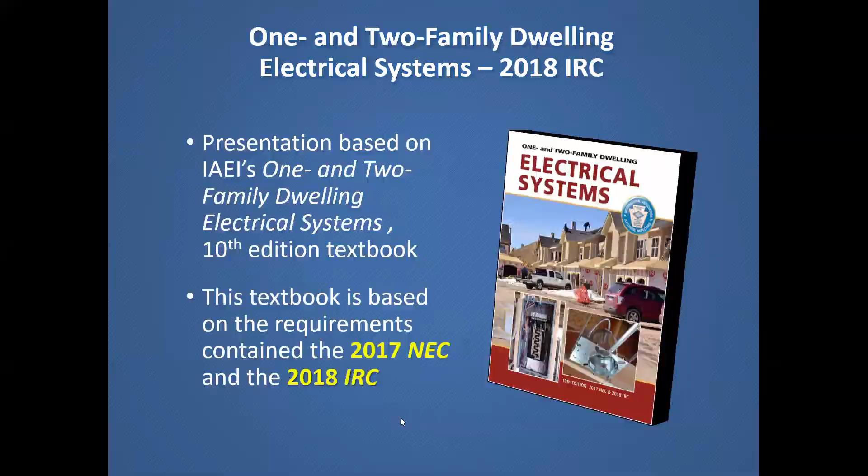When I build the PowerPoint for this presentation, I actually build 2 PowerPoints, one based on the NEC and one based on the IRC. And of course, the one we'll use today is based on the IRC. Now, when you start dealing with the electrical requirements of the IRC, you have to set some parameters or ground rules here. Like I said, Part 8 is where the electrical requirements are found in the IRC, beginning with Chapter 34 through Chapter 43. And I wanted to highlight this first sentence right there. I'll blow it up where we can read it.

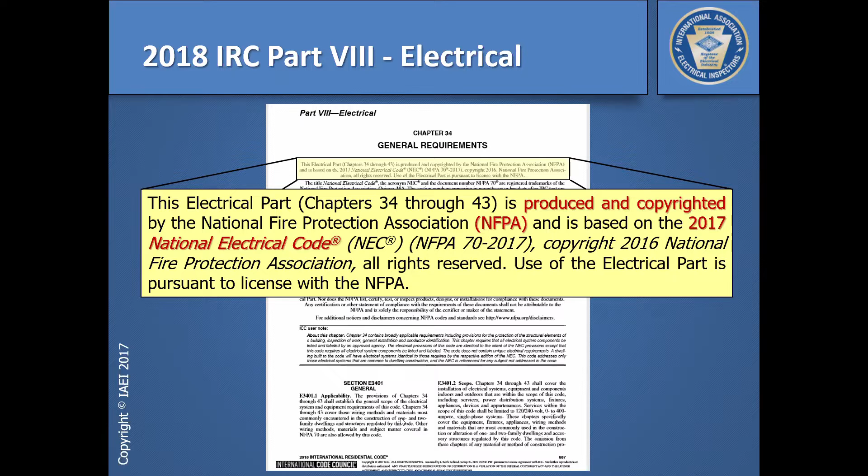These electrical parts are produced and copyrighted by the National Fire Protection Association. The reason I bring that up is that's the exact same people that write, own and copyright the National Electrical Code. So a lot of times people will look at the IRC Part 8 as one electrical code and the NEC as another electrical code, which it is, but it's all basically the same material, and it's written and produced by the same people. And right down here, it even says that the electrical provisions of this code are identical to the intent of the NEC provisions.

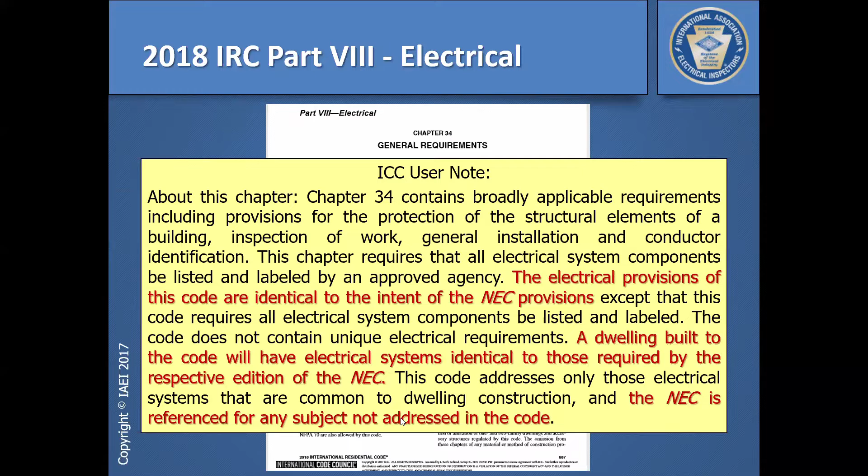And it also talks about if we come across something here in the IRC that is not covered in Part 8, it tells us at E3401.2 in the scope of the IRC that when we come across something that is not particularly covered by the IRC, we can't just ignore it. We have to default to the NEC.

So, let's say the IRC will address an electrical service up to 400 amperes. Well, if you got into a large dwelling unit with a size larger than 400 amperes, then we would default to the NEC. And you'll see several places as we go along today where we would have to default to the NEC, and of course I'll point those out to you as well.

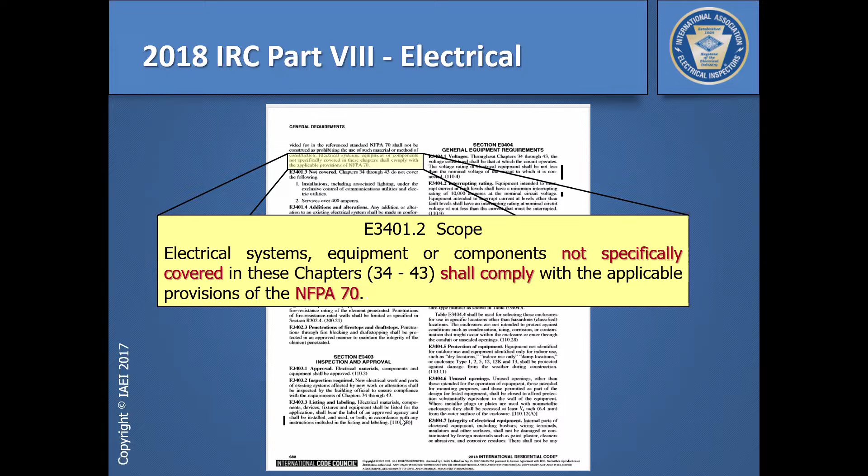I suspect greatly that I have several combination inspectors on the line with us today. And if that's true, of course, you have to be prepared and enforce several codes, not just one code: the mechanical code, the electrical code, building code, and so on. And especially when I'm doing a class with combination inspectors, I often hear that of all the disciplines you have to enforce, you typically have the most difficulty with the electrical code,

and that there's gray areas in the code, and that's really not a mistake. It's not. It's by design, actually. And so yes, there are gray areas in the code, and we need to address them. An example of that I could give you here is E3601.6.2. Now that's 230.70(A)(1) in the National Electrical Code.

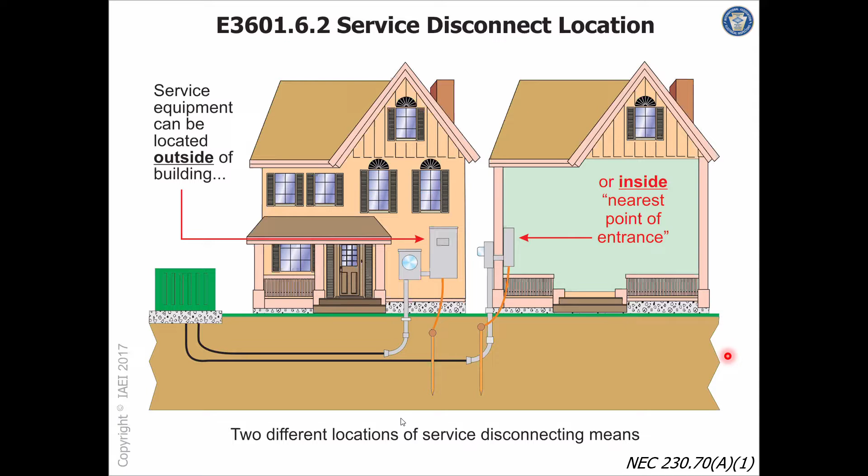So yes, there are gray areas in the code, and I can make you a better inspector leaving this presentation today than when you came into this presentation if you'll just simply do one thing for me: embrace gray areas. Don't hide from them. One of the worst experiences I've ever had in my career was being a student in a class, and the instructor would not embrace gray areas.

When we would get to one of those quote unquote gray areas, the instructor would just jump past it right quick and say, "Oh my gosh, hope nobody asked me a question about that." Well, that's not what we're going to do here. We're going to look at these gray areas and embrace them and discuss them so that we can get some semblance of consensus interpretation for some of these rules.

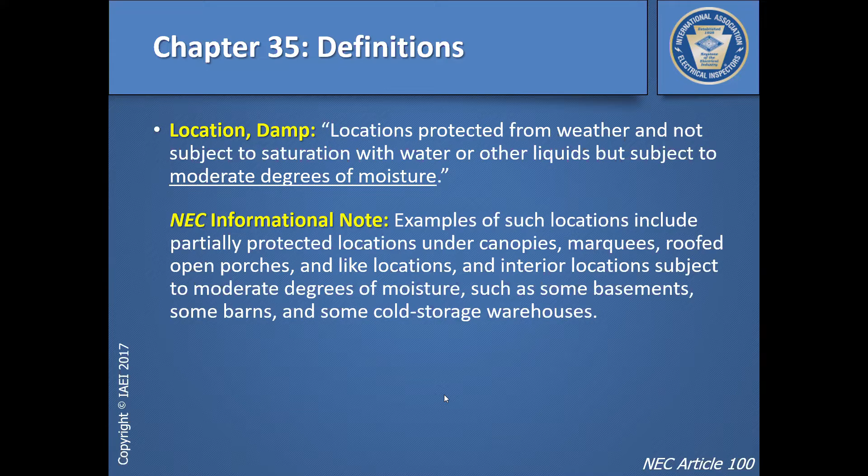Now, here's your first question of your test here today. Who's going to determine which location we're in? There you go, everybody. It's the AHJ. Now, hopefully the AHJ will use these definitions out of Chapter 35 or out of Article 100 in the National Electrical Code to make a determination as to where you're at.

The first one we see here is a damp location, and that tells us that in those locations, we're going to be subject to moderate degrees of moisture. In the National Electrical Code, it even gives us an informational note and gives us some examples of where a damp location might be. Locations under a canopy, marquees, roofed open porches, places like that.

When we used to travel, and hopefully we'll get back to that at some point, I used to stay in a lot of hotels, traveling and doing these training presentations. And a lot of times I would pull up to a hotel and they'll have a canopy or a drive-through, where you can pull your car up. If it happens to be raining or something like that, you could pull up under that overhang and unload your luggage and things like that.

And it's just my nature. I can't help it because it's my business. Anytime I get in an area like that, or a restaurant or wherever I'm at, I'm always looking around for code compliance, code violations, things like that. And I can't help when I pull up under one of those overhangs there at a hotel, I'll look up and say, that's a damp location right there. That's a wet location right there. Those type of things. And there's some places up under that overhang that I would consider a damp location if I were the authority having jurisdiction.

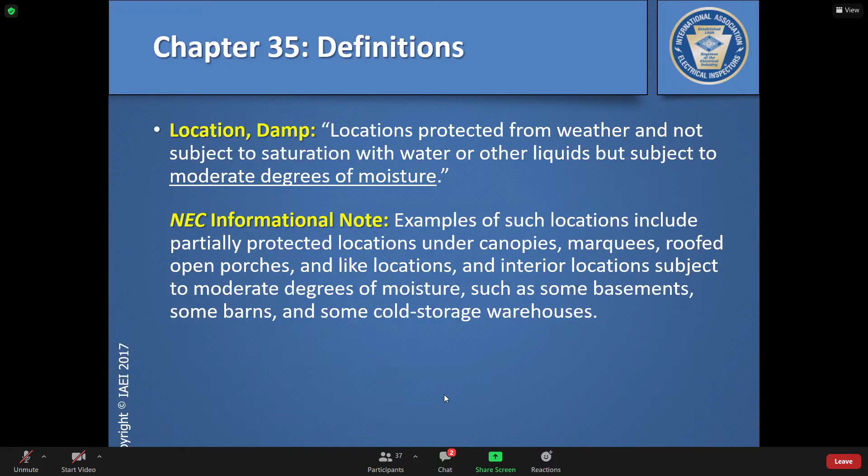And then we look at the next location, a dry location, and that would be a location not normally subject to any dampness or wetness. And man, whoever came up with this definition, I think they hit this one right on the head. I like that term, not normally subject. How many times have you seen on the news when a hurricane comes through an area, and you'll see buildings that are normally not subject to any dampness or wetness, but yet during that hurricane, there's water 5 feet up on the wall. So yeah, I think they kind of nailed that definition right there. Locations not normally subject to any dampness or wetness.

I'm looking on the screen here at some of y'all's photographs and images, and looks like a lot of you are at your house. Some of you are at your office. I happen to be at my office today, and my office here in particular, if I were the authority having jurisdiction, I would determine that this is a dry location. It's a location that's not normally going to be subject to any dampness or wetness.

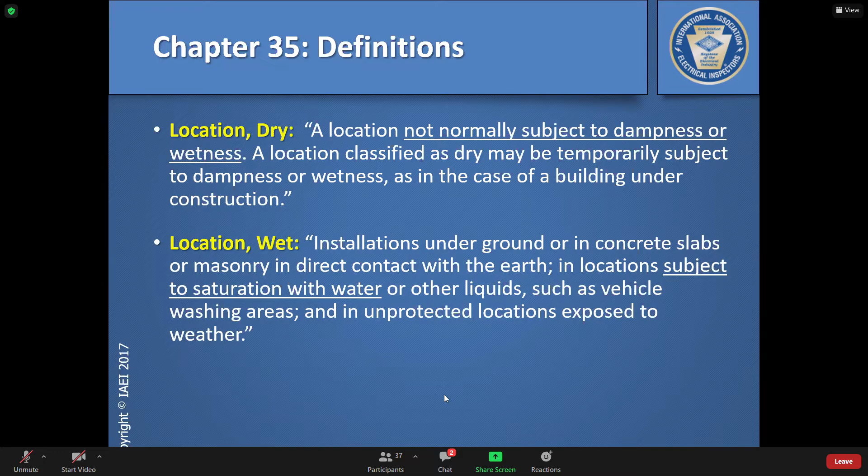So we've got three choices here, either a damp, wet, or dry location. All of them are defined in the code for us. And now we need to go put these into practice. So we find ourselves standing in the backyard of this particular dwelling unit, getting ready to do an inspection. And we've got a receptacle right here. See that receptacle right there? Let me blow it up for you where you can see it. I've got a receptacle right here.

Now, you as the authority having jurisdiction, we need to determine, is this a damp, wet, or dry location? I suspect greatly that most of you would rule out a dry location pretty quick, but I bet we could get a pretty good discussion going on as to whether or not this is a damp or a wet location. Now, remember my two dogs this morning. Technically, that receptacle is located up under this porch, this overhang right here. So based on that, we could lean toward a damp location.

Let me ask this question. Here we go again. Who cares? Keith, why are you wasting my time with this? It would matter what the authority having jurisdiction says, because this cover right here, that cover for that receptacle, is only identified to be used in a damp location. If the AHJ determines that that's a wet location, then that is a code violation right there. That's why all this stuff matters.

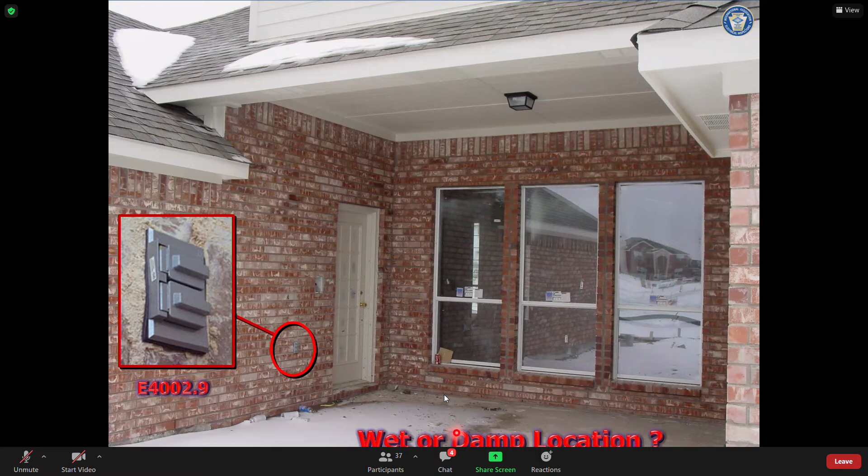If you look at E4002.9 in the IRC, that's going to be like 406.9(B), I believe, in the National Electrical Code. It would tell us that in a wet location, you have to have a cover for a receptacle that provides weatherproof protection, whether or not a cord cap is plugged in. In other words, the in-use cover, the bubble cover, we call it out in the field a lot of times, and that cover right there is not identified for a wet location.

Now I got to tell you, if I'm the AHJ, I would consider this a wet location right here, even though it's technically under this overhang right here. I still think this receptacle is subject to driving rain and snow, subject to moderate degrees of moisture. So I would determine that that's a code violation and you need an in-use cover right here.

What if that receptacle is not there, but it's located right there? Now we're way back under that overhang right there. Now what would you determine that to be? Could we use this flap cover right here? If I'm the authority having jurisdiction, I still think that's subject to driving rain and snow. I would still consider that a wet location. Does that make me right? Well, it does today because I'm the instructor, right?

No, here's my point to you, ladies and gentlemen. Somewhere, maybe like right there, there's a line of demarcation between a damp location and a wet location. Now, your line of demarcation is going to be 3 feet from mine. Carla's line of demarcation is 2 inches from where mine is. Jamie's is 5 inches from where my line of demarcation is. Who's going to determine that line of demarcation? The authority having jurisdiction. So yes, even in our definitions, you're going to find some quote unquote gray areas like this that you're going to have to make a determination on.

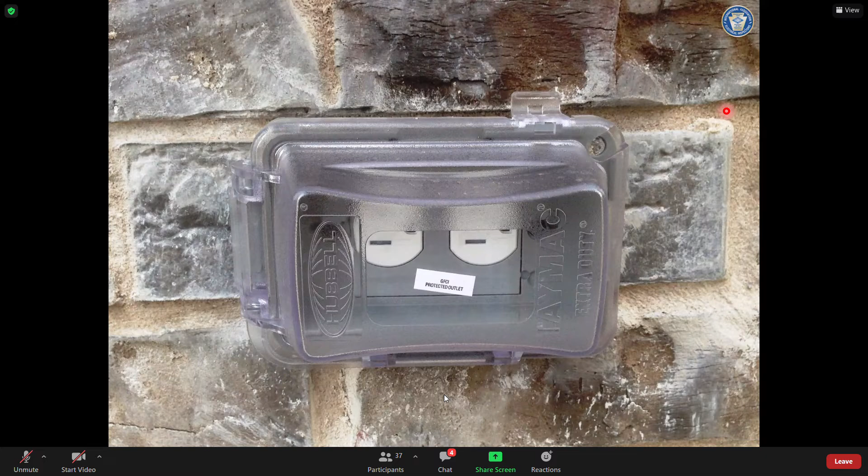We talked a little bit about that service disconnect a while ago when I was trying to give you an example of a gray area. And of course, if we're going to have electricity at a building, we're going to have a service, and a service disconnecting means it has to be located in a readily accessible location. Here we go again. How are you going to enforce this rule here if you don't know the definition of readily accessible? That's a defined term in Chapter 35 and in Article 100 of the National Electrical Code.

You know, there's two similar definitions. One is accessible and the other one readily accessible. Now, accessible means like a junction box above a drop ceiling in my office here. That's required to be accessible. In other words, I could get a ladder, climb that ladder, remove a ceiling tile, and gain access to that junction box right there, and that would be perfectly within code.

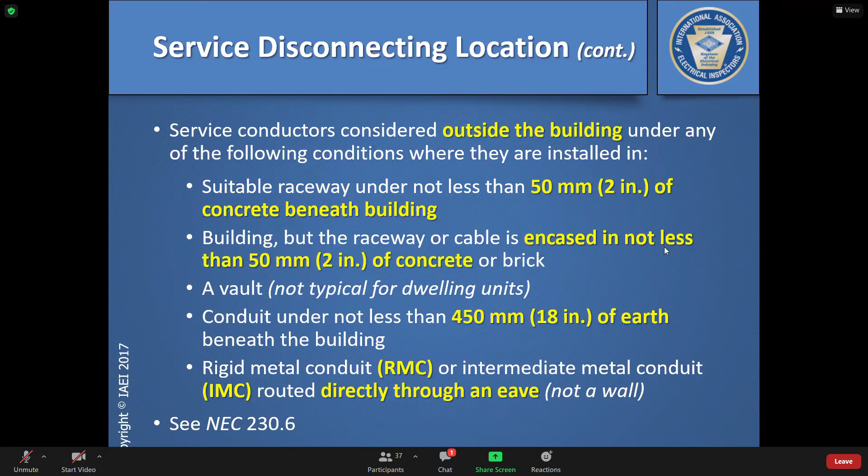And of course, you'd have to maintain proper working space and so on about that thing. So, somebody made the decision and said, no, we're not gonna do that. Instead, what we're gonna do is we're gonna go ahead and set our service disconnecting means on the outside of the building. And then we're gonna run a feeder through the building, maybe over to the other side of the building to the garage, and we're going to locate a feeder panel board, a sub panel board, if you will, in the garage, fed with a feeder.

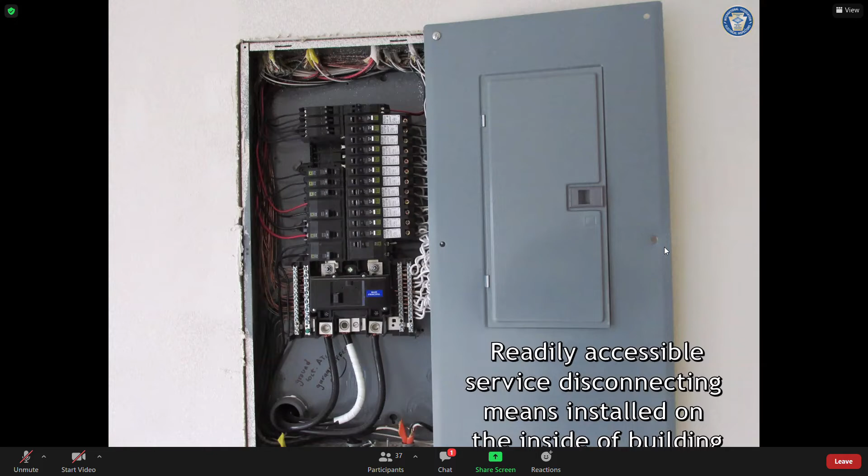And my nearest point of entrance doesn't apply here because my first means of disconnect is located outside, and my service stops on the line side and a feeder begins on the load side here. And I can go as far as I need to go inside the building because I have overcurrent protection ahead of these conductors that I'm running inside the building to something like this right here, where you have a feeder coming in, first means of disconnect, and then your overcurrent devices and so on here.

Now, again, the overcurrent devices, you got to be real careful right here because we're talking service disconnects and we're talking dwelling units, and chances are pretty great. It doesn't have to be, but a lot of times at a dwelling unit, you'll see a panel board with a main breaker in it. And that serves as that quote unquote first means of disconnect.

And a lot of times people will call me because we have rules that tell us that we cannot locate overcurrent devices in the vicinity of easily ignitable materials such as a clothes closet. We can't locate the overcurrent devices over a stairway. We can't locate them in a bathroom. And a lot of times people will call me and say, Keith, man, I know I was in one of your classes or something, and I remember you saying that a panel board can't be located in a clothes closet.

Well, and I can't find that in the code. Where is that? Well, the reason you can't find that in the code is because the code doesn't say that. What the code says is overcurrent devices can't be located in a clothes closet. Literally, remember my 2 dogs this morning? I could locate a panel board in a clothes closet all day long. What I couldn't do is put any overcurrent devices in that panel board, which why would you want to do that? So you got to be careful with what you're looking for when you start looking in the electrical code, trying to find some of these rules. And this one is specific to overcurrent devices, not necessarily the cabinet that contains the overcurrent devices.

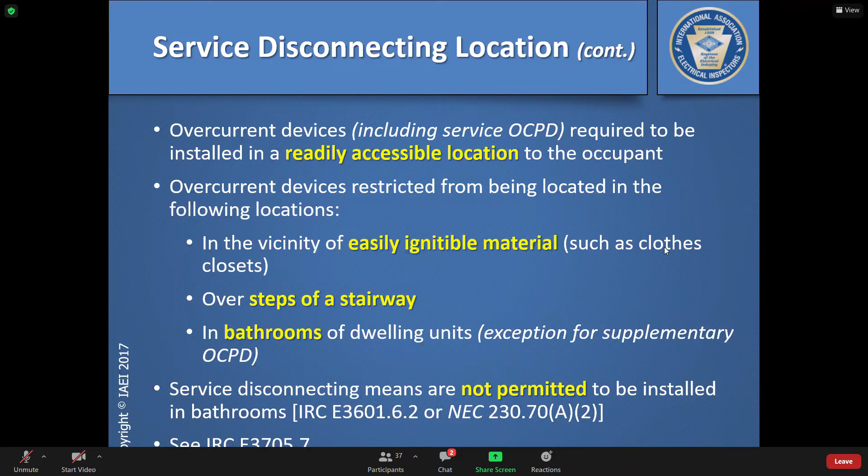So no, at a dwelling unit, we cannot locate a panel board. Boy, here I go. I just said the opposite of what I just told you, didn't I? We cannot locate overcurrent devices in a bathroom like this. They have to be located in a readily accessible location. We could put it right out here on the wall of the hallway or something like that. We would have to maintain working space if we chose to do that.

That's why most people will go ahead and put a disconnect on the outside and then run a feeder inside and locate your overcurrent devices like in a garage, the wall of a garage or something. And again, you got to maintain working space in those areas as well. I have a question. Okay. Go ahead.

In your last slide with the overcurrent devices in the bathroom, I've had to make a decision because I've had that presented to me in an existing condition, and I've had them encapsulate it and make it weatherproof. Was that a good decision? No. Now you have a code violation that's been weatherproofed.

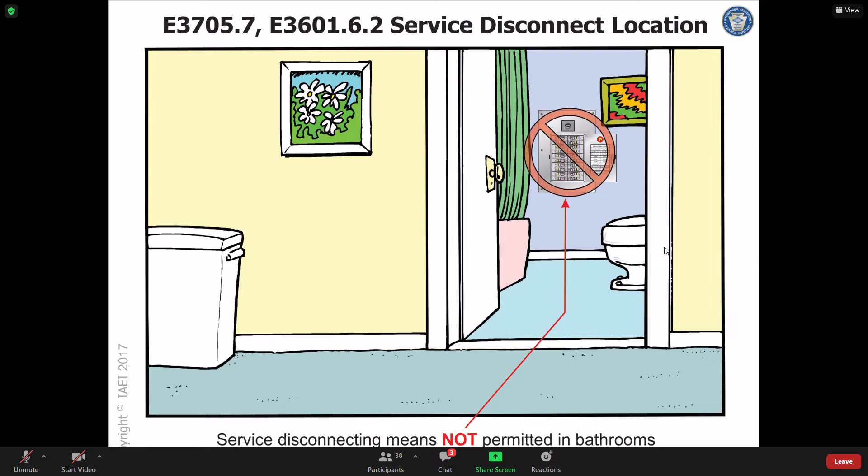Now, something like that, you know, in a cabinet or something, I think that no matter how old it is, that would probably still be a code violation, because the working space requirements that you have to maintain around equipment like that have been in the code since Moses was around. So then you've got to tell the people to rip the kitchen cabinets out? Not all of them, just that one. And remove the jar of pennies next to it.

Yeah, that's right. We have to properly mark service disconnecting means. It has to be identified by the manufacturer that it's suitable for use as service equipment. Have you ever heard the term SUSE rated? That's what that means, suitable for use as service equipment. And the manufacturer will mark their equipment as either suitable for use as service equipment, suitable only for service equipment, or suitable for use as service equipment when not more than 6 mains are installed, something like that.

A lot of times you'll have a panel board where the manufacturer actually provides a bar that can be removed, and that bar attaches to the intentionally grounded terminal, your neutral conductors, and the other side attaches to the equipment grounding terminal bar. And if you're going to use that as service equipment, then you would leave that bar in place. But if you were using that as a feeder panel board where you have to isolate your grounded conductors from your grounding conductors, and we'll get into that later, you would actually remove that bar.

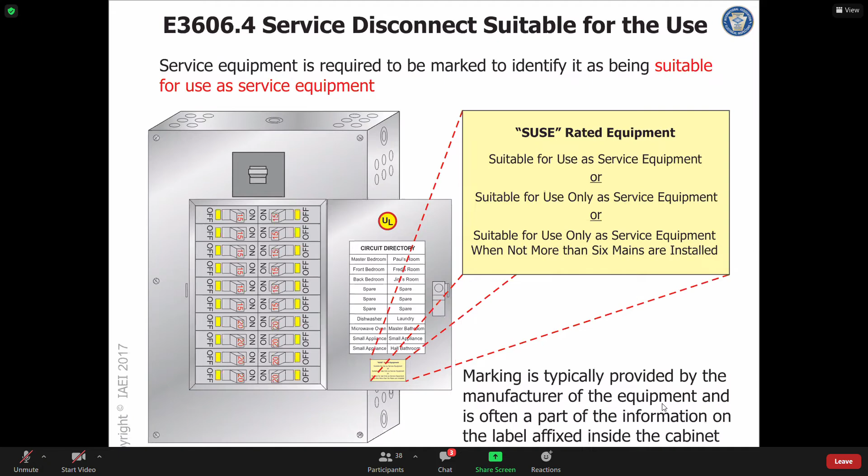Your service disconnecting means have to have a permanent marking on them, identified as a service disconnect. The manufacturers do a real good job helping us meet this code requirement. A lot of times they will provide a label that we can put on a piece of equipment like that one right there. If we're going to use that disconnect as service equipment, we can put that label on and say yes, this is a service disconnect.

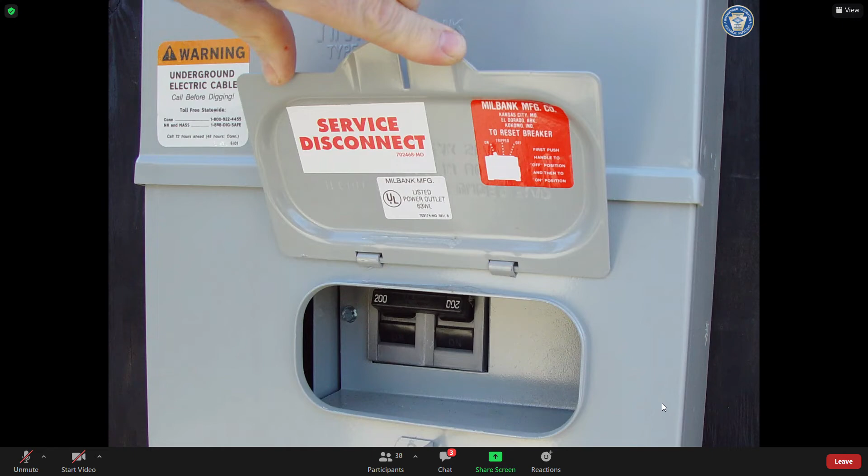One thing I forgot to tell you at the beginning of this presentation: this presentation is based on the requirements of the 2018 IRC. The 2021 IRC has just been published. That coincides with the 2020 National Electrical Code. And so, 8 times, 10 times or so throughout this presentation, I did put in some slides that talk about a change that's coming to the code that you probably need to be aware of.

Now you're going to easily be able to recognize these. It's not going to be part of the material that you downloaded of that electronic version of the book that we produced. But I did want to give you a heads up that there are some changes coming that you need to be aware of. And one of them is right here.

At E3606.5, which is 230.67 in the National Electrical Code, we have a new requirement coming that's going to require whole house surge protection for dwelling units. And this surge protection has to be located at the service equipment of a dwelling unit. It has to be an integral part of your service equipment, or it can be immediately adjacent thereto.

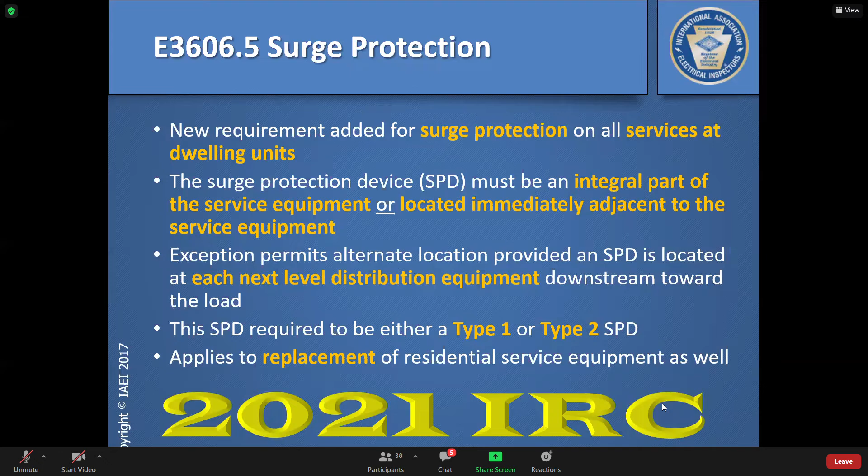In other words, if you go to grandma's house that's 40 years old, 50 years old, and you upgrade the service at grandma's house, and the local jurisdiction is enforcing the 2020 NEC or the 2021 IRC, that new service would have to include this whole house surge protection right here.

Lots of the manufacturers of service equipment panel boards, your Eaton's, your Cutler Hammer, GE, every one of them. Gosh, I just went blank with the rest of the panel board manufacturers there. But anyway, every one of them, because of this rule, and typically in the electrical industry, particularly when we provide the manufacturers with a code requirement, the opportunity to build a better mousetrap, they typically step up to the plate and build a better mousetrap, particularly if there's money to be made at the end of that rainbow.

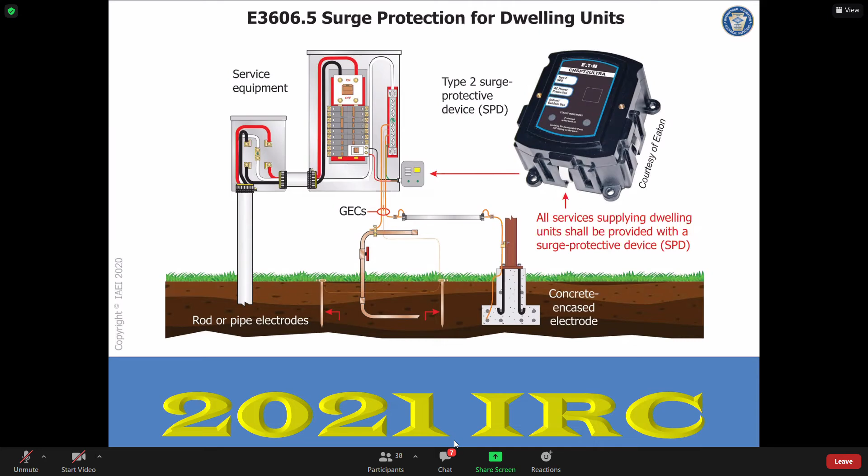And so every major manufacturer, Siemens was the one I was trying to think of, all of them have come out with a residential panel board that has a built-in surge protection device right in the panel board. It'll be located like right there. Or you could buy an external surge protection device that's located where? Immediately adjacent to the service equipment right here. But that is a change coming in the next edition of the code, and I just wanted you to be aware of that right there.

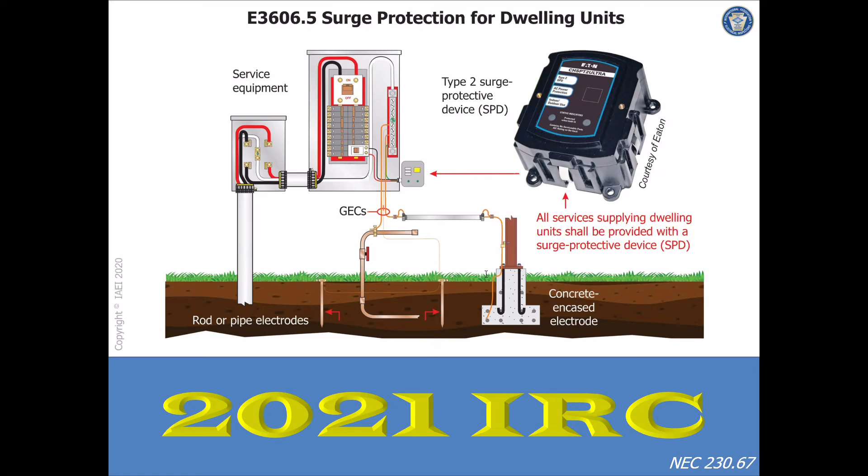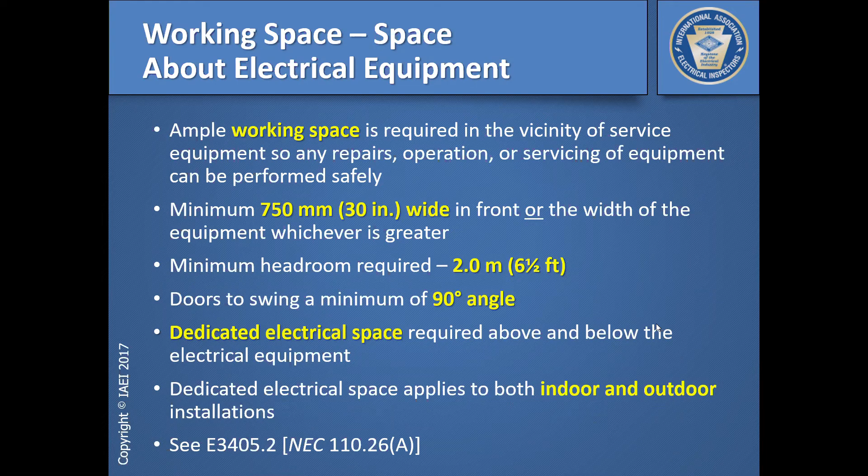We talked a little bit about working space when we're talking about service equipment, panel boards in particular. We have to talk about working space, and it's a cube of space that has to be maintained in front of a piece of electrical equipment, such as a disconnect or a panel board or whatever it might be. There's actually 2 spaces that we have to concern ourselves with around electrical equipment. One of them is working space and the other one is dedicated electrical space. And those are 2 completely separate spaces.

And again, that purple space belongs to the electrician. It goes up above whatever piece of equipment that is, up to 6 feet above that equipment, or the structural ceiling, whichever comes first. Now, at a dwelling unit, if you have a sheetrock ceiling with 2x6 rafters, floor joist, ceiling joist above it, that would be your structural ceiling.

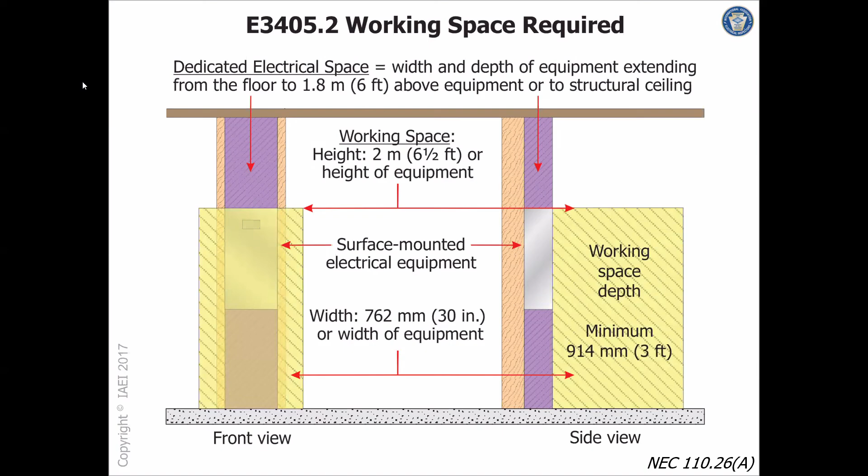And again, your working space is required to be 30 inches wide, or the width of the equipment, whichever is greater. So in other words, if you had 3 panel boards lined up here, and these spaces can overlap each other, your working space in this case would be from that corner right there to that corner right there. But if you just have a single panel board like you typically do at a dwelling unit, you just need that 30 inches wide, typically 36-inch deep space, 6.5 foot tall.

And a lot of people will try to tell you that 30 inches needs to be centered on that piece of equipment, and that's not true. That's a misinterpretation of the code. Even if you put it in the corner, I need 30. If you can give me 30 inches, 36 inches, 6.5 foot tall, we're good to go. You probably would have to hope that your electrician's left-handed in this case right here, but that meets code right there.